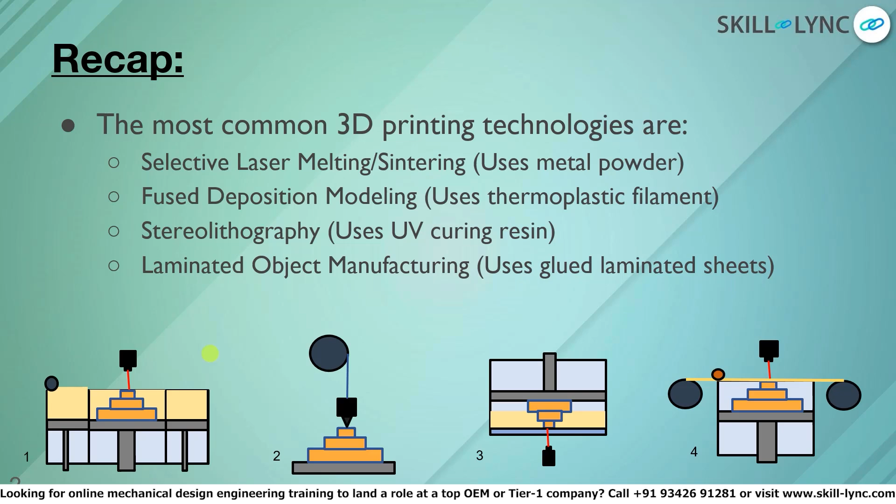However, in this week, what we're going to cover are 3D printing limitations of each of the technologies that we've discussed. Some of these being how the build direction of parts affects the speed of manufacturing the part and the end strength of the piece produced, and how we can orientate parts in SpaceClaim to suit our needs for the end piece. Another issue that we'll be discussing is steep slopes and overhangs, for which we'll look at using supports to overcome some of these limitations.

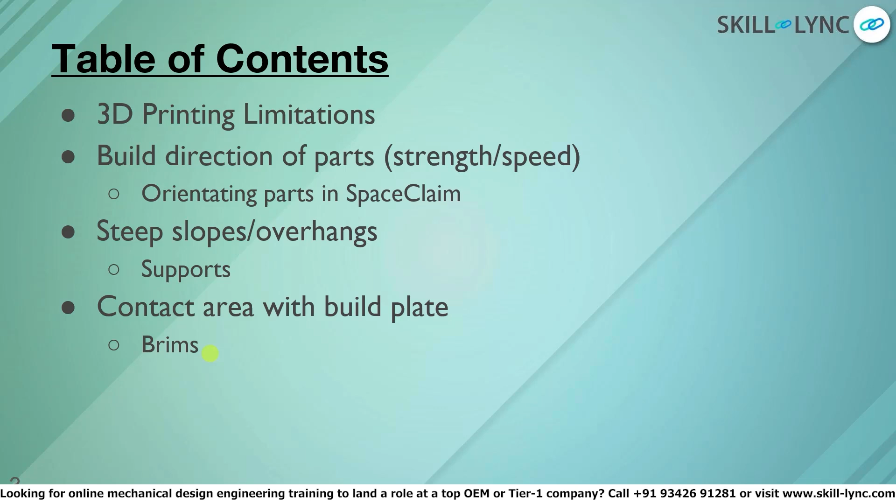And lastly, we'll also cover contact area with build plate issues, such as in an example where when we're building a design and it doesn't have much area in contact with the build plate on the base layer, this can result in a few adhesion issues. However, we'll look at how we can overcome these issues using brims.

After we discuss the issues and how we can resolve or alleviate some of the issues, we'll be looking more into detail on how we can design our pieces for these issues so we don't have them using 3D printing. We'll also look at what infill is, the iterative process when 3D printing, and post-processing after printing is complete. We'll also look at slicing software that prepares the 3D models before they can be 3D printed, some of the more common file types that you'll find when you are 3D printing, and at the end of this course, we'll also be having a final project.

The learning objectives for this week: to learn about some of the printing issues that you may come across when printing your part, some of the techniques and tools that you can use when 3D modeling to overcome some of these 3D printing issues, how you can design parts specifically designed to be 3D printed, that is, designing with 3D printing in mind, and you'll understand how 3D printing works from a process flow perspective, from start to finish, and the different file types needed at each stage.

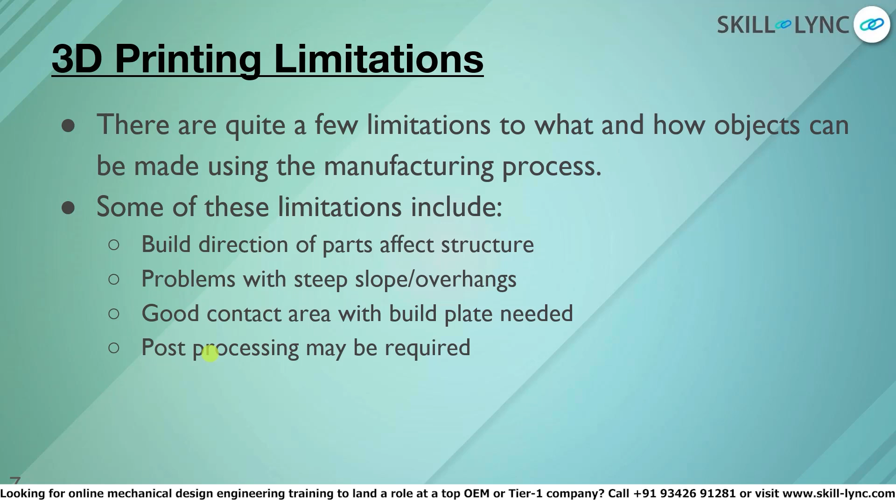And lastly, considering surface finish or some additional structures that had to be added to support the piece being printed or to alleviate some issues previously discussed, post-processing may be required where once 3D printing is completed, we might have to sand the surface of the object to achieve a smoother finish or remove some of the support structures that were assisting during the printing process. Let's dive deeper into the build direction of the parts and how this can affect the speed and the strength.

As we've covered previously last week, 3D printing is a layer by layer process. So we start off with the base layer and add on top of that layer by layer until we end up with our finished piece. Considering this layer by layer process, it is important to take note that the bonds and structures within a layer are much stronger than in between the layers.

So if, let's say, you have a model that you want to 3D print and you split this model up into 100 layers, the strength between layer 1 and 2 would be less than the strength within layer 1 itself. This is because in most 3D printing applications, you have to heat or melt some of the material in points or in a layer before you can add another layer on top of that.

So considering within a layer, there's much less time for the piece to cool down. And as you are melting a certain point, it also heats up the surrounding geometry. The adhesion or the melting within a layer can occur better than in between layers because there's that delay for the 3D printer itself to shift to the new layer height to add on top of it. That's a lot of detail, but as long as you understand that within a layer is strong, in between layers less strong, you should be good.

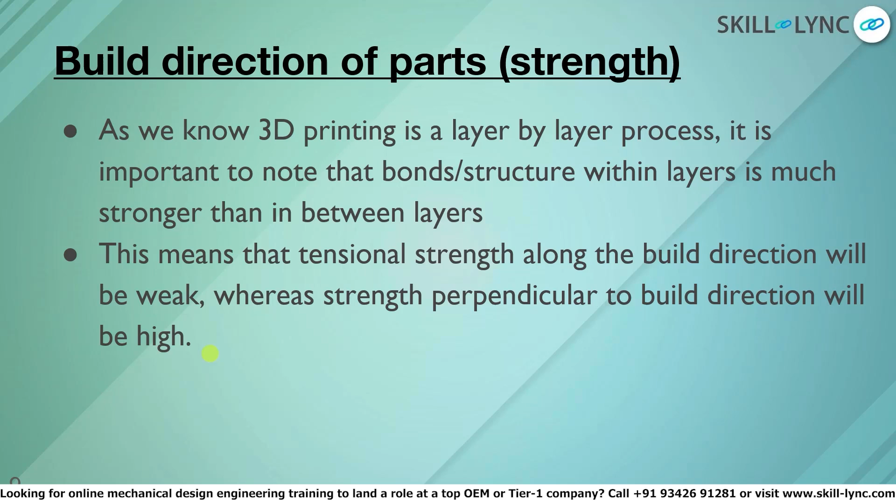However, this means that tensional or pulling strength along a build direction will be weak, but perpendicular to the build direction, the strength will be high. So if we look at an example, this can make a bit more sense. Imagine you are building or fabricating a hook for a device, a contraption, or application of your choice, and this hook is meant to be designed to lift a weight.

Right? So if we look at this hook over here on the right, in image A, you can see that we've built it with the bottom of the hook facing down and the top of the hook facing up. So it's standing vertically. If you look at the cross section over here, you can see that the layers are horizontal, or the layers are built up from bottom of the hook to top of the hook. So within a layer is sideways from left to right. However, in between layers is from bottom to top.

Considering this hook is meant to support a load, the load would be pulling straight downwards on the hook. This might have an effect of trying to peel the layers from each other. And considering the adhesion between layers is low, there is a high chance or a high risk of this design failing its purpose.

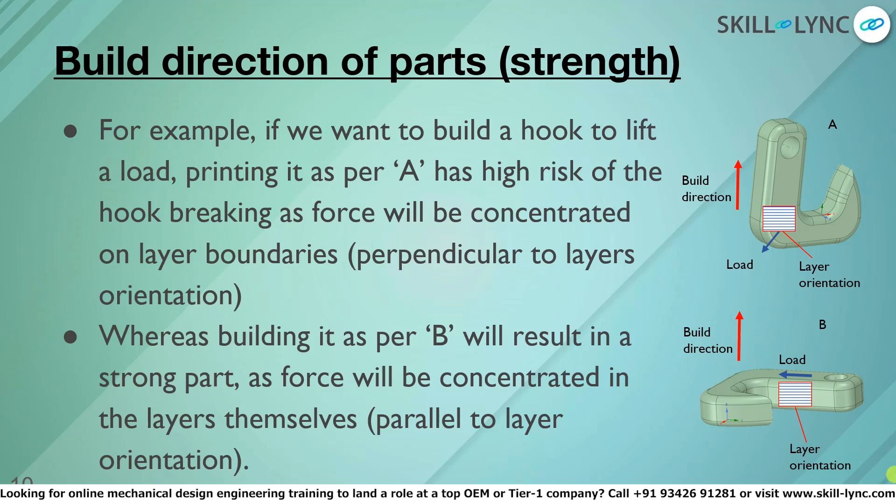And this would mean, considering that the strength within a layer is strong, it has less of a chance to break. And most definitely it'll be better suited to supporting a load than the orientation as described.

We have also mentioned that the build direction of the parts can affect the speed of the print. So what does that mean? How can the orientation or the direction that we build the parts affect the speed of the print, considering that the parts would theoretically have the same volume? So we are not creating a bigger piece, we are creating the same piece. So what adds to the time?

Well, this is because generally printing a layer is much faster than transitioning and printing several layers. That's because 3D printers have to stop printing a layer, shift to a new layer height, and then start building the second layer on top of that. And this takes far more time.

If we look on the bottom, we have one hook oriented vertically, and to the right of that, we have one hook orientated on its side or laterally, as per our previous example. If we were to split the hook on the left into layers of a certain thickness, let's say 0.5 millimeters, and the one on the right into layers of thickness 0.5 millimeters as well, then obviously the one on the left would have more layers because it's taller, whereas the one on the right would have fewer but much wider layers.

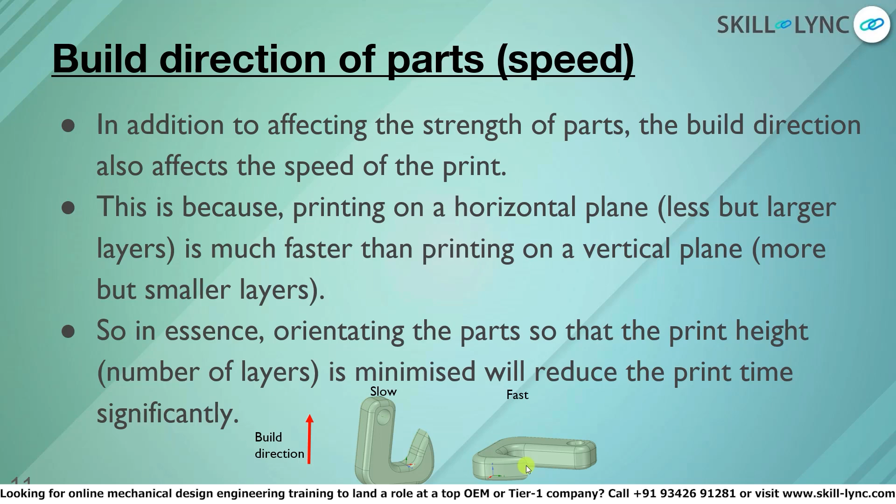If you have less layers but bigger layers, it's still much faster to work within a layer than in between layers. So your time is reduced. So pretty much considering this, the taller or the larger the object is in the build direction, the slower the 3D print or build will be. Whereas if it's much shorter in the build direction, or if it has less layers, one is analogous to the other, the print speed will be much faster. It will take you less time to end up.

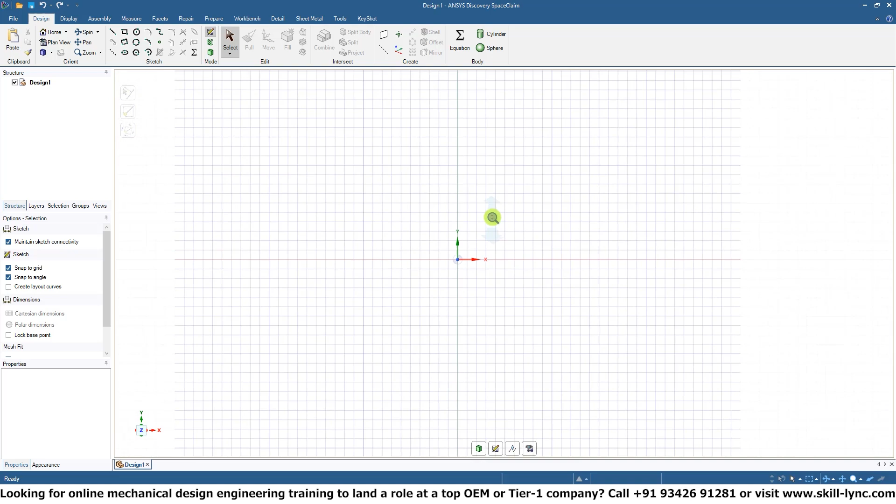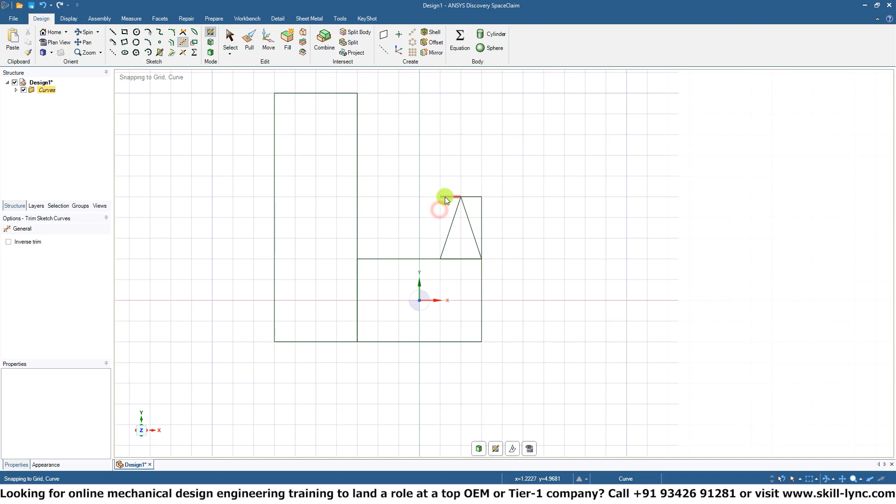Now let's see if we can have a look at how we can change the orientation of our parts in SpaceClaim. So if we go back to our example of the hook and try to just create a quick hook for demonstration purposes, using some of the tools that we've already learned, where you start from simple geometry and you just work your way up from there. Right now I'm just creating a few rounded corners. You can also do this with fillets if you've already created the geometry.

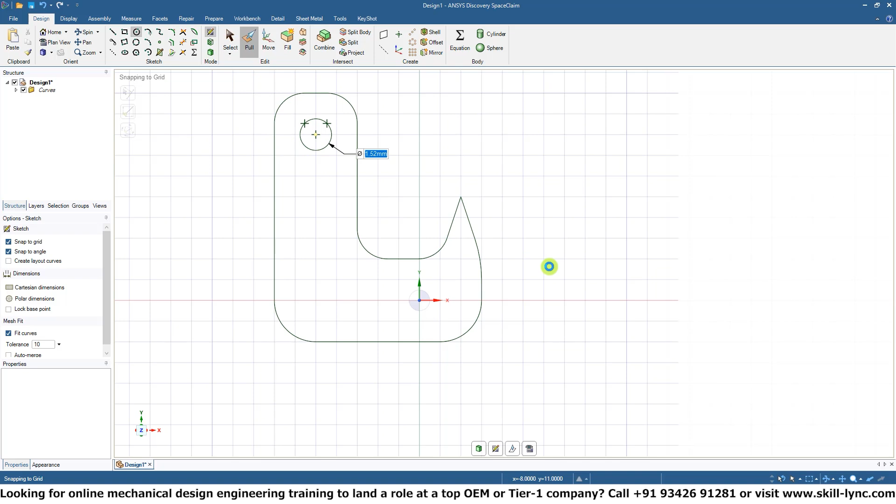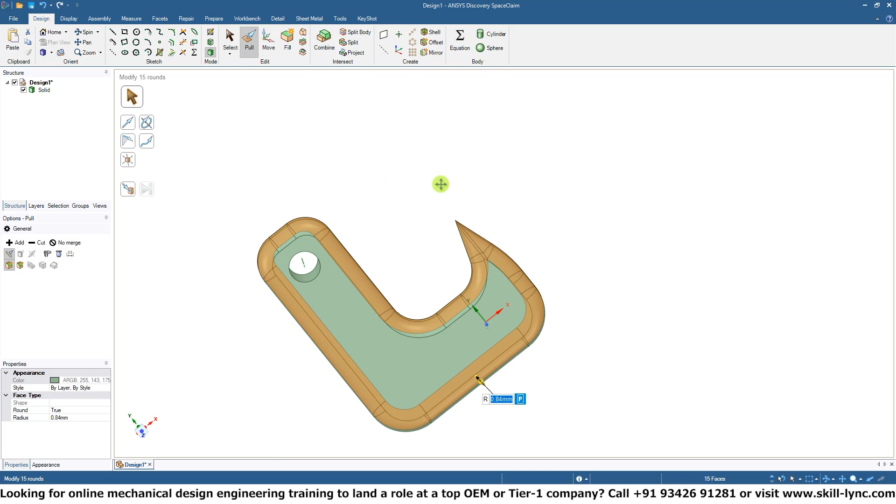Considering the amount of tools that SpaceClaim offers, there are many different ways to create your geometry. If you double click on an edge, it selects all the edges around the perimeter. That's just a little hotkey or top tip when you're playing around with geometry. There we go. So in a few minutes, we can end up with something like this. This is how I've designed the hook. If you've been practicing the tools that we've covered up to now, this should be relatively quick and easy for you.

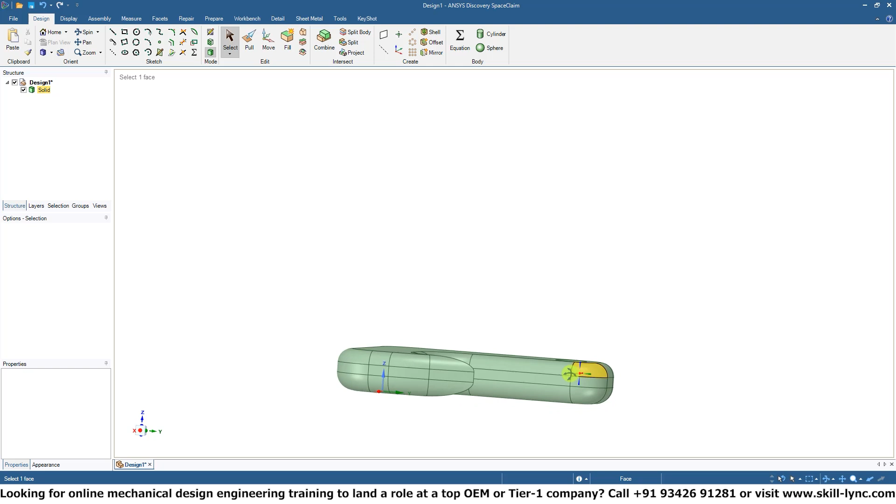So right now, you can see we've built the hook in the YX plane. So when you end up printing it, generally you print pieces along the Z-axis, or that's how they end up being orientated. Let's say we actually wanted to build the hook vertically along the Z, or we wanted to change the orientation. How would we go about this? Well, first we'd have to select the whole hook. How do you select the whole body? We've seen how to select the face, how to select an edge, maybe how to select edges around the perimeter by double clicking. Well, if you triple click a body, it should select the whole solid body.

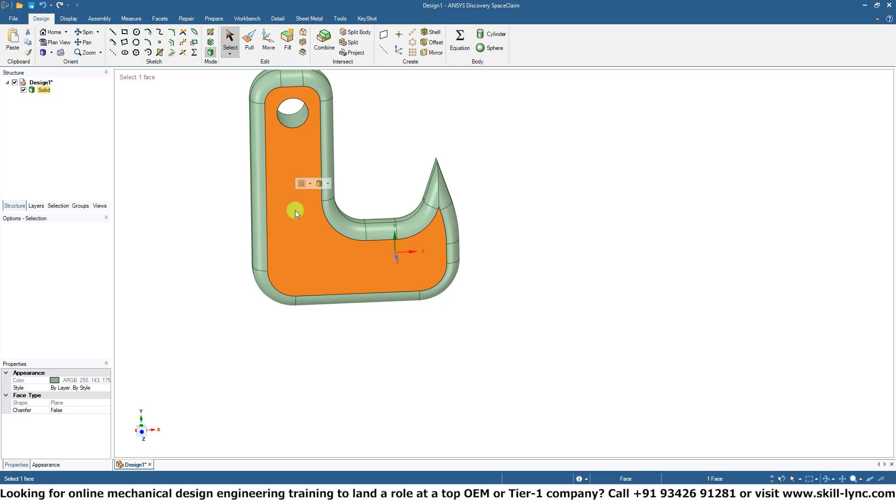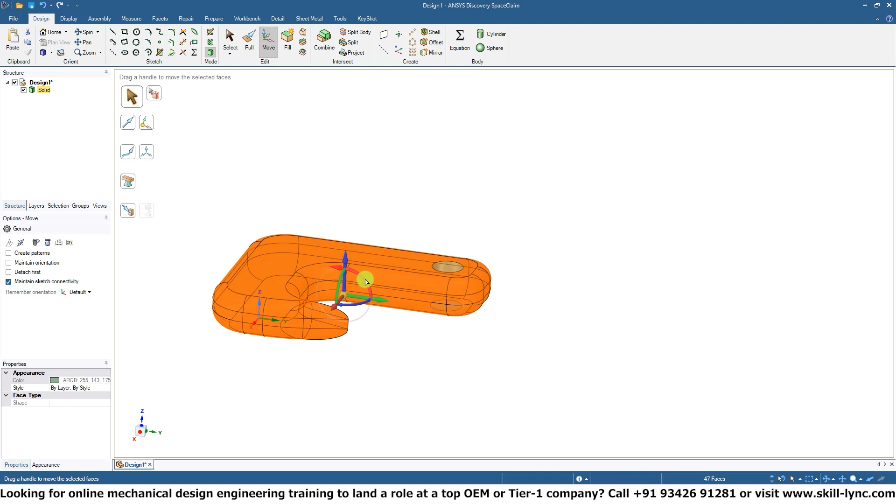Yeah, there you go. Now that you have the whole body selected, you can click on the Move tool that we've covered previously. This adds a set of axes to our model. Now, if you can see right here, our model is in the XY plane. We want to rotate it along the X axis, so this face can face vertically upwards. Considering we want to rotate it along the X axis, which is the red one, we click the red arc to go around. And considering we built it flat, we only need to move it to 90 degrees. You can just type that in if you wish. And now this has rotated and reorientated our model in the Z axis.

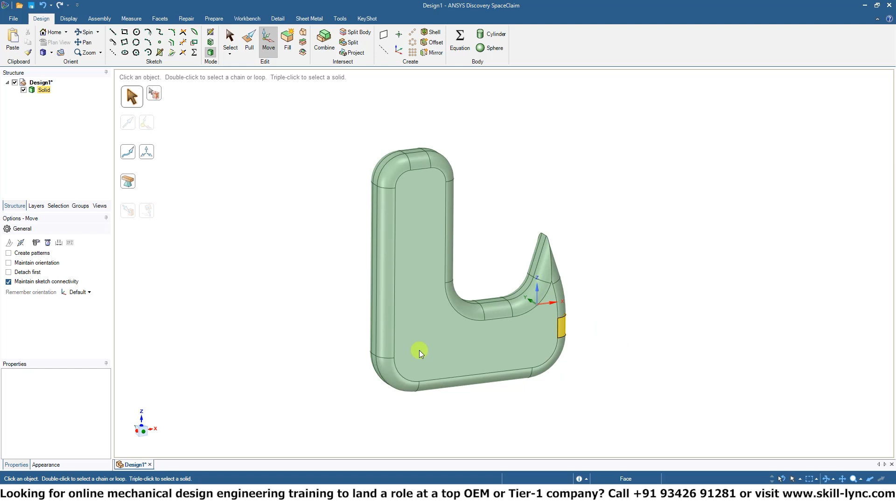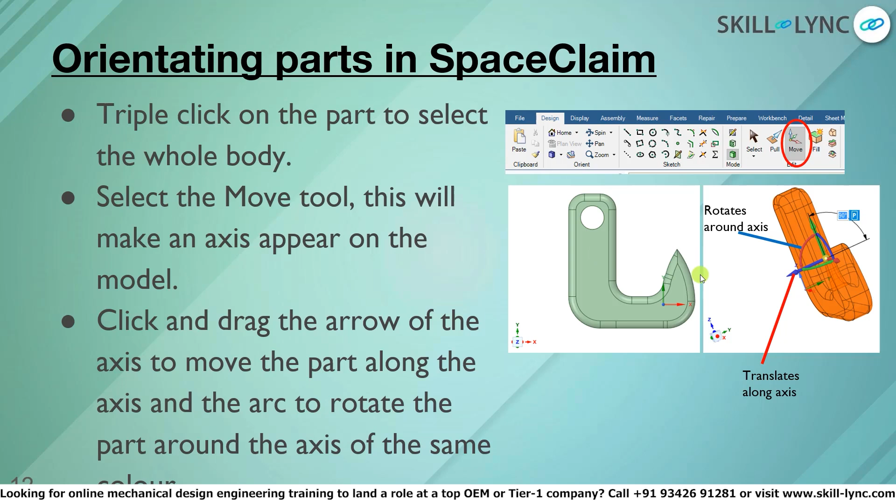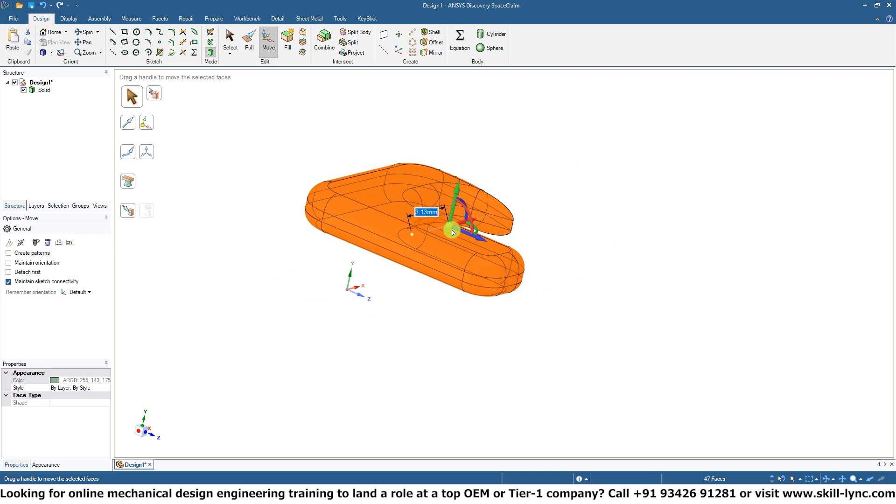So pretty much what we have is our model orientated. If we click along the Z, it lies straight over here. Okay, so let's see. We've covered triple clicking the body in order to select the whole model, the axes that appear, clicking on the arc and rotating. Also, you're not limited just to rotating. You can also move the body. If you click on an axis and drag, you move it along that axis. So we can move it along Z, along Y, along X as well. Any of these axes, we can move our model along there. It's not just for moving around features. Okay.